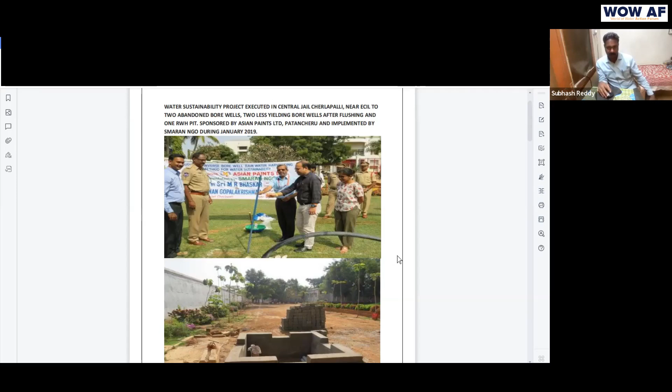So this is the first borewell, and this is the second one. Here the water used to stagnate for many days, and there is an abandoned borewell. Some are only 200 feet, some around 500 feet are the maximum there inside. This entire water used to go in whenever it rains - excess only used to go outside the compound wall.

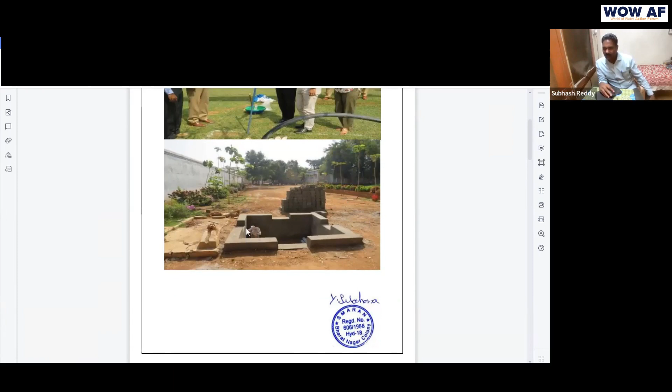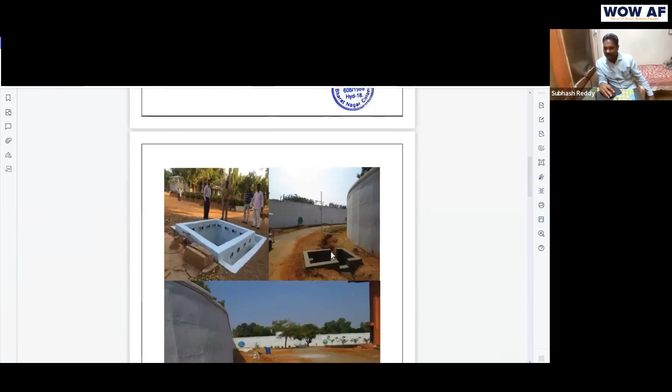This is one structure, and there are 2 compound walls. Between these 2, the entire stretch has few borewells. This small canal used to go outside - there's a borewell luckily on the way. So we made it into a connected structure, so rainwater will go inside the bore, and excess can again join the normal stream.

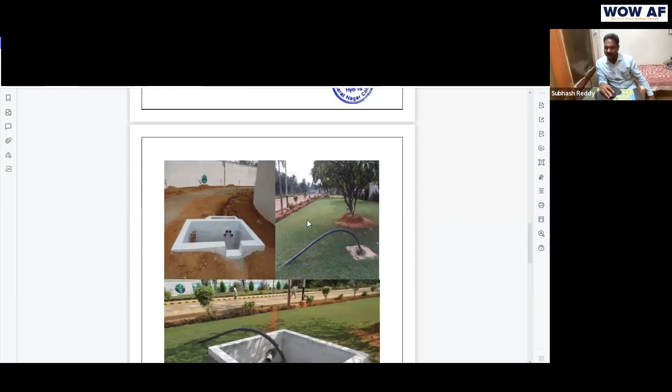And we have done to many working borewells also - the yield increased. See, this is one - this is the stormwater drain, and we laid a pipe, and the structure is there. We call this entire structure inverse borewell, IBW RWH - inverse borewell rainwater harvesting. The same borewell can extract, the same borewell point can recharge.

So this is what we combine - no separate one for recharge, no separate one for extract, the same bore. It's done professionally - with some experience and team, we have done to many borewells like that.

To convert into IBW RWH, we need to know the history of the borewell - when it was dug, depth, casing, what was the yield in the beginning, how the water came when the bore was dug. These are some points, and out of experience also we locate whether we can do this to the bore or not.

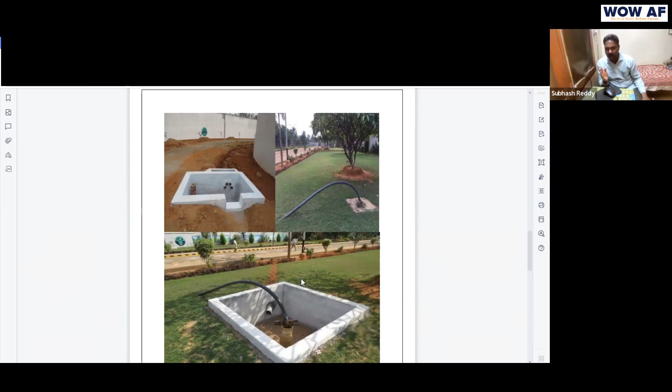This is also one old borewell. There are also some missing pictures in the 4 acres vegetable garden. We have done to 2 borewells - there are 4 borewells inside, 2 are almost near the wall.

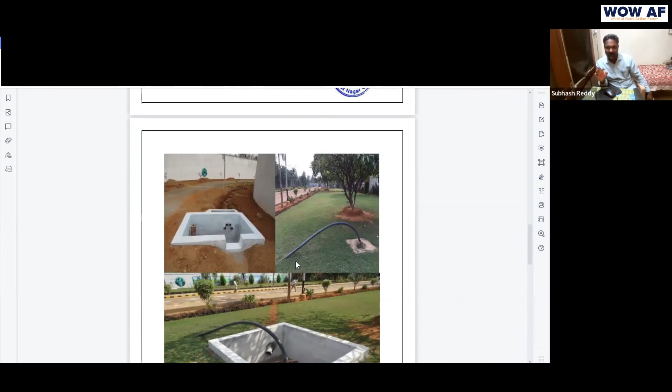4 feet water used to stagnate there for a few days. After doing those 2 structures, the water immediately goes inside, and it is supporting the other 2 borewells. So the 4 acres vegetable plot - the inmates, the prisoners - they are able to do that activity throughout the year without looking for tankers. So this was a success we achieved in the Cherlapalli jail.

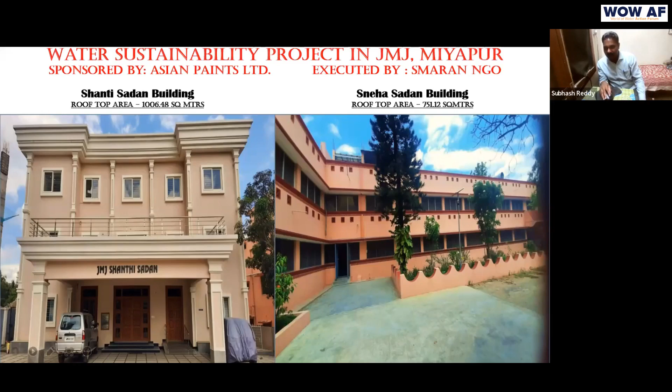Earlier, all water used to go through downtake pipes onto the ground and outside. And they have a 1400 feet borewell - see, this is the borewell. When I went in 2019, 2018, I noticed this borewell. It was lying on the road - they wanted to close it because there's no water, 1400 feet, there's no water.

They wanted to close it. Then I found - I want to tell one fact. I was with a geologist for some time in the beginning, to know the feasibility of the borewell point location. But later, somehow I met one person, and I'm very thankful to him.

He used to see bore points with a green coconut. While going with him, he said, I can also see such points. So I was embarrassed to hold a green coconut, because I was an employee, having some education - I'm telling this fact somehow. Through that, I found that this has some layers, fissures are there. So then I said, please protect it, we will convert it into a structure one day.

So I was able to hold it. Otherwise, they wanted to put stones and soil into it and close it, because there used to be children's - it's an orphanage. So then this is one more borewell, with lesser depth.

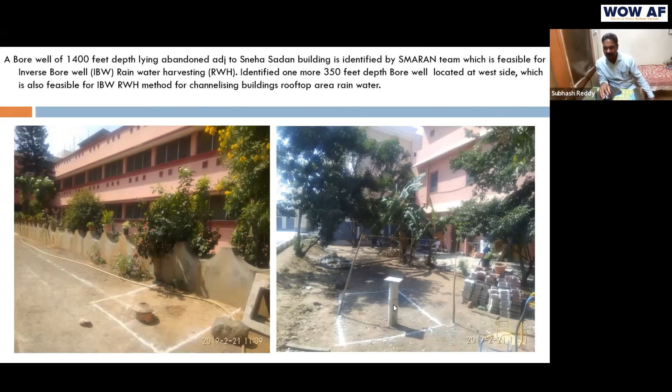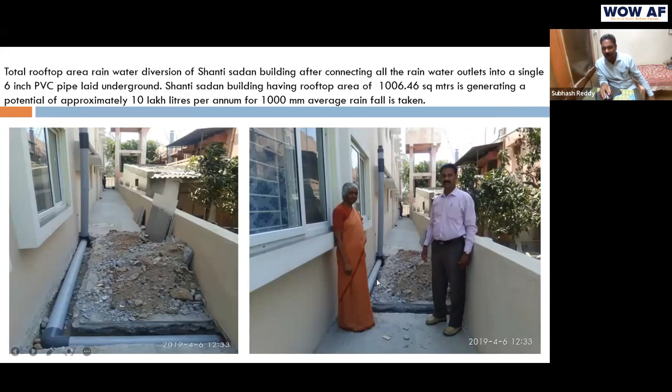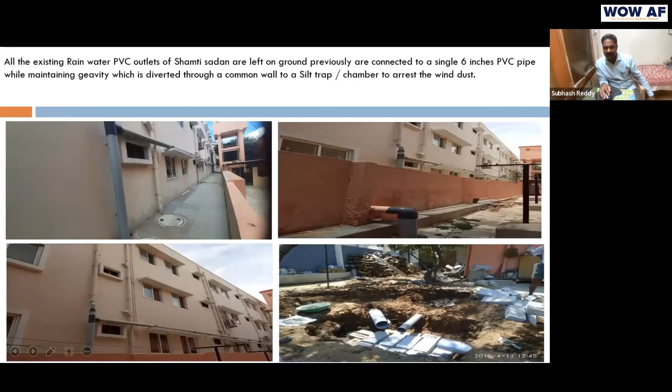See, we have diverted all the rooftop water through some CSR support only, and here. So entire water - see the first building and the second building. See, the entire rooftop we are able to get to one point. This is the entire water at one pipe. This is a chamber - this is a collection chamber of one building.

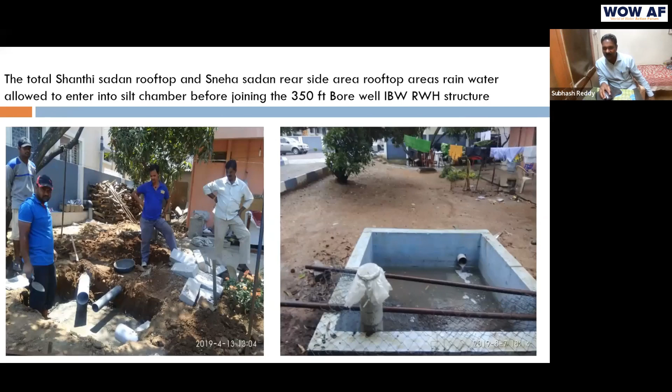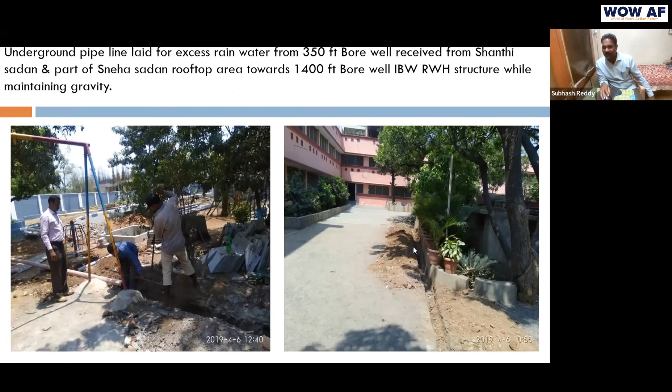First going into this borewell, which is 350 feet depth only. This is the structure we made - this is the one structure. And excess of this is routed through gravity to the 1400 feet borewell - the excess will go from here. So luckily we are able to channelize entire water to the first borewell, and the excess to this borewell.

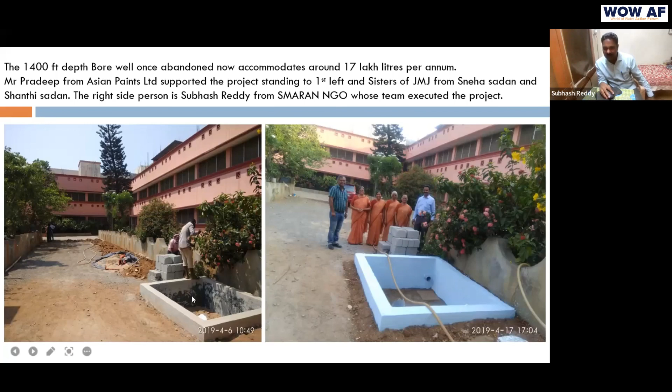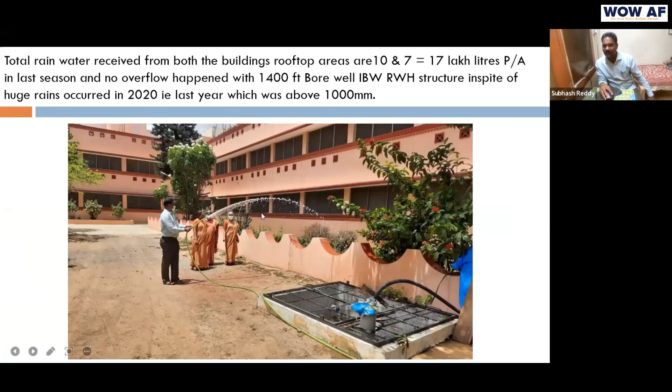Also, this building's water goes into this building's borewell. So for the 1400 feet borewell depth, we are able to channelize the entire rooftop water - 16 lakh liters to 20 lakh liters per annum has to enter into the borewells only, not outside. So this structure, in spite of heavy rains, has no overflow, because there are fissures. And they're able to put a motor and draw water now - so entire water is going into the deep aquifer.